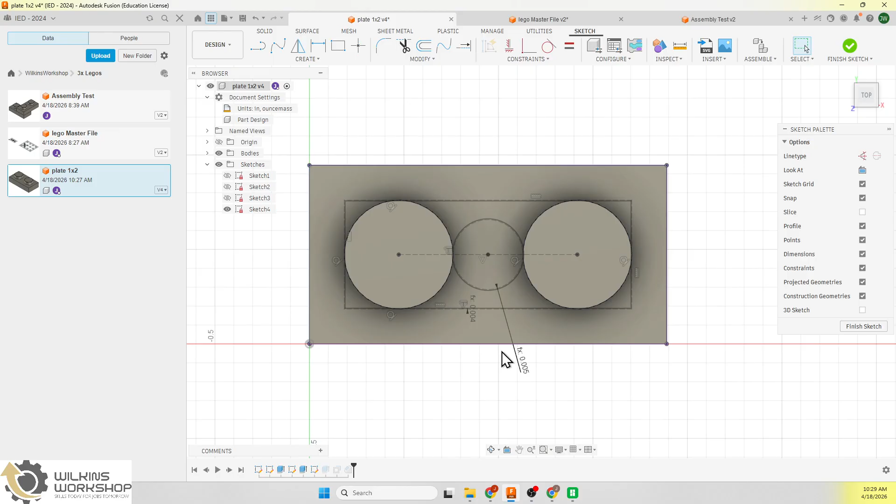So I went ahead and did a modification, and I'm reprinting now. Instead of doing a kerf divided by 2 for this offset, I went ahead and made it kerf. So it should squeeze a little bit more on the sides, and that should give us a little bit better grip onto our material. So we're going to test that. In about 30 minutes, I'll have 2 new parts, and we'll test if the fit on those is better.

These fit together, but again, not thrilled with it when you just put a single pin in there. It's a little loose, and really putting the double pin, if you have a stack of 4, they don't hold together, they just fall apart. If you just put 2 together, they sort of stay, but even then it's a little off. So we're going to make that adjustment and move forward. But until we get those done, we're going to move on and make some more pieces.

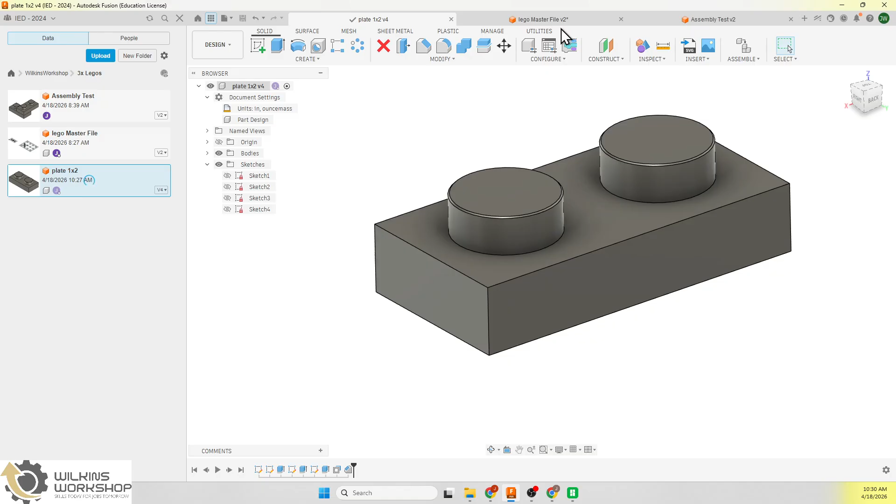So I'm going to go back to my Lego master file. I'm going to make this adjustment here to kerf, same as I made on my other piece, and we'll see if that works out. We'll just keep updating that master file as we need.

Right now we're going to learn how to make a parametric Lego, so we can make a bunch of different blocks or bricks with one file to start with. So let's save this one - we'll do a file save as.

Let it upload, finish here. And we're going to call this parametric Lego.

And now this time we're going to essentially just build a 1 by 1, and then we'll use a rectangle pattern to make whatever part we need from that 1 by 1.

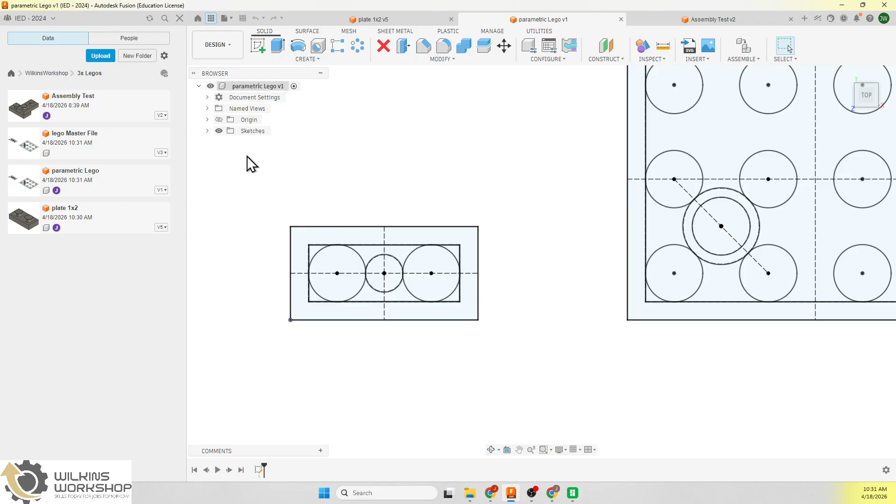So we've got our parametric Lego going. We're going to turn off this sketch, start a new drawing, and we're just going to do a 1 by 1 here, so it's going to be a Lego base by Lego base.

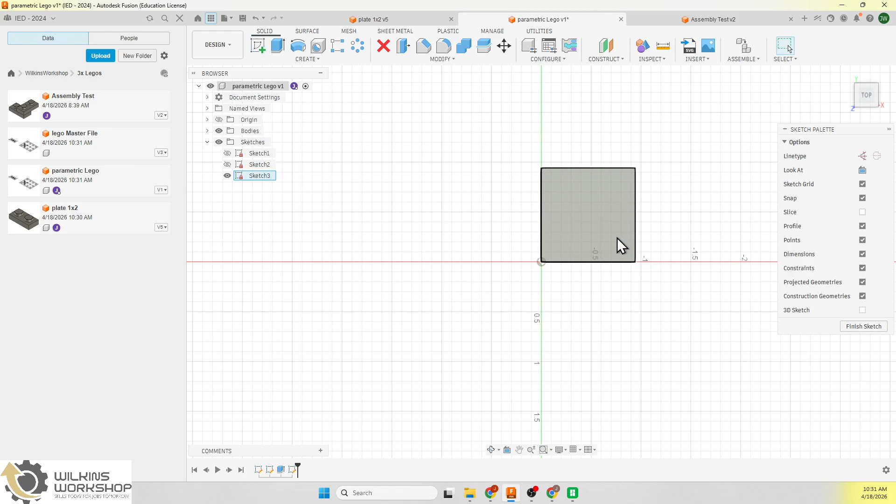We're going to extrude by partial. We're going to make a construction line across and make a circle for our stud. Dimension that, extrude that. And this is the start of our parametric Lego.

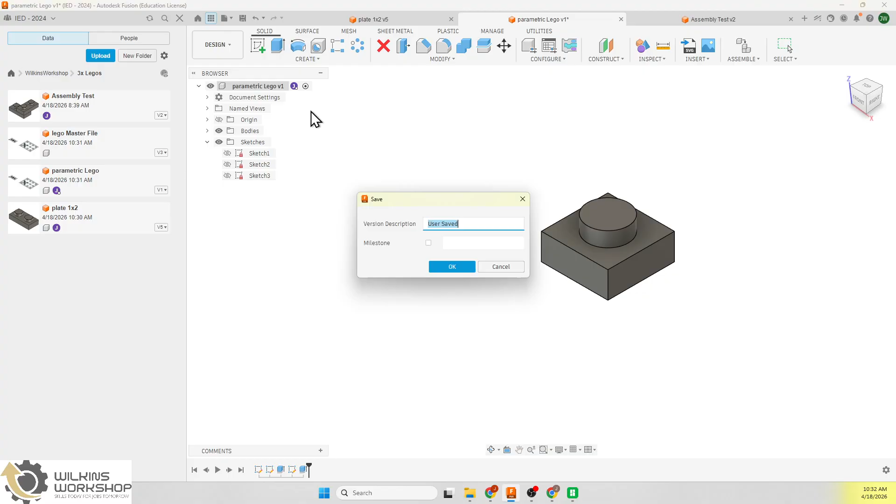So we're going to go ahead and just save that as is. And now we're going to move on to our next plate. If we look at our parts list from before, you can see that we've done our 1 by 2. Let's go ahead and make a 1 by 6, and then eventually we're going to need a 1 by 4 as well. Actually, let's do the 1 by 4 first, then we'll move to 1 by 6, and then we'll show how to make the 2-bys as well.

So at this point we can do a rectangle pattern, but we're going to do a file save as. Actually, let's just do it right here in our parametric Lego, and then we'll do a save as once we set our parameters. We're going to add 2 more parameters to this.

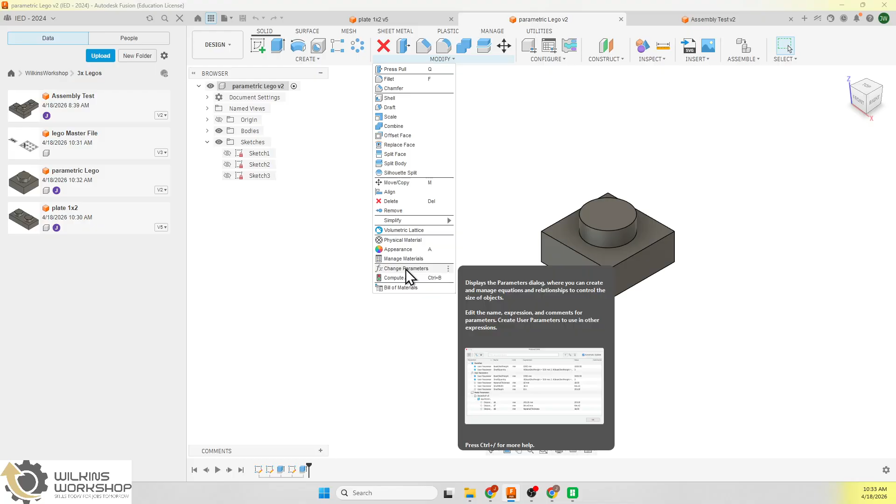Let's add a width. This is going to be a unitless quantity, and we're going to start with 1 - so number of studs on the width.

And then we're going to add a length. Again, this is a unitless quantity, and we're going to do a 4. This is number of studs, length.

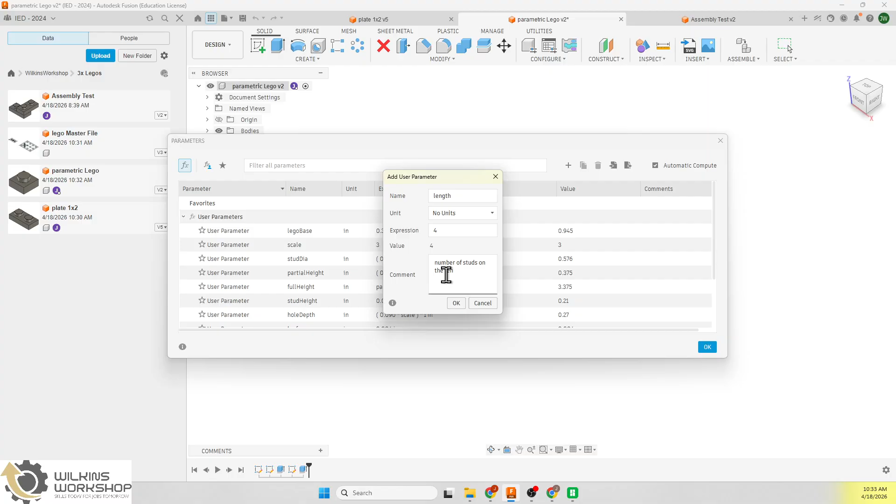And now when we do our rectangle pattern, we're going to rectangle pattern some features, and we want these 2 features that we're going to rectangle pattern. We're going to pick our axes as this one and this one, and we're going to move this way and this way. Let's change this to a 2 so we know which one we're dealing with - so you can see there it is.

We're going to do spacing - spacing on this is going to be Lego base, and spacing on this is going to be Lego base. This is only going to be a 1 in this direction this time, and this is going to be a 4 this time. But instead of using actual numbers, we're going to say length, and on this one we're going to say width, and then say OK.

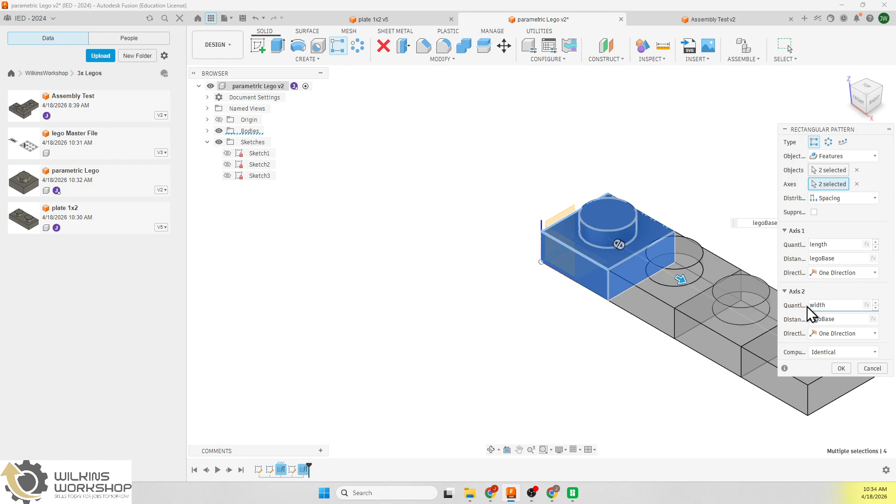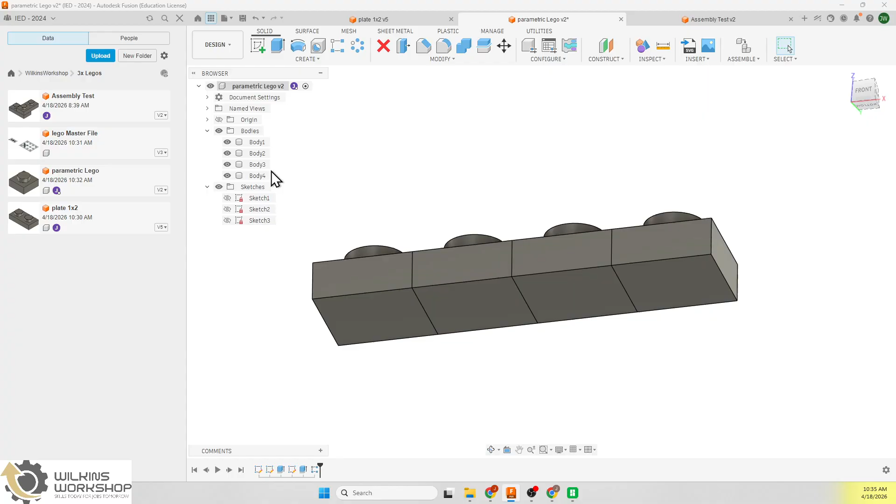Now we want it to join those together. So the question is why is it not joining those as one? See how those are independent - they shouldn't be individual bodies, they should merge together into one unit. So let's figure out why it's not happening.

If we pick bodies, we just select the body. And that didn't work either. Well, this is always fun when you're trying to figure things out as you go.

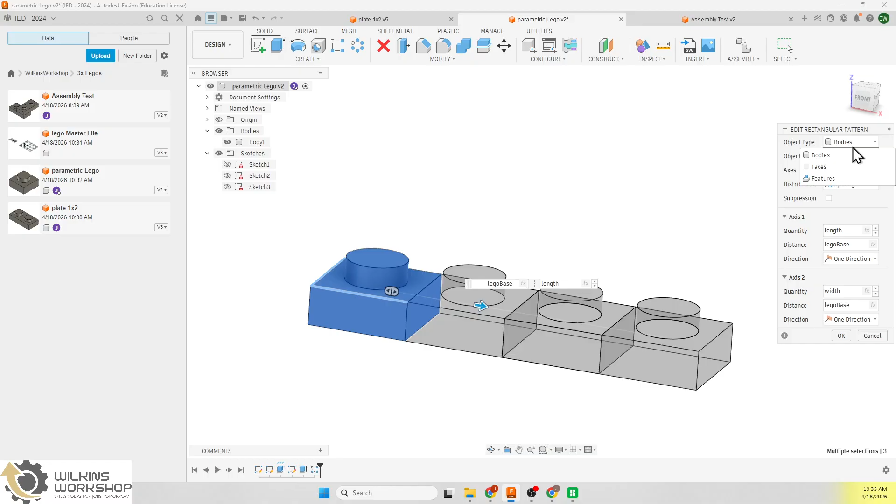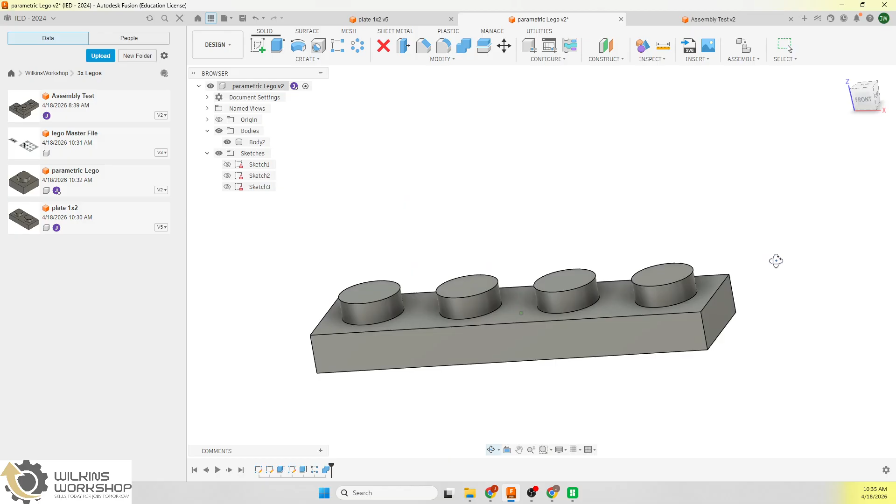I guess at this point we could just take all of these and merge them together using the join tool. We'll just use that as a workaround. Sometimes those will just fuse together. I'm not quite sure why they're not, but that's okay. We're going to go with it here.

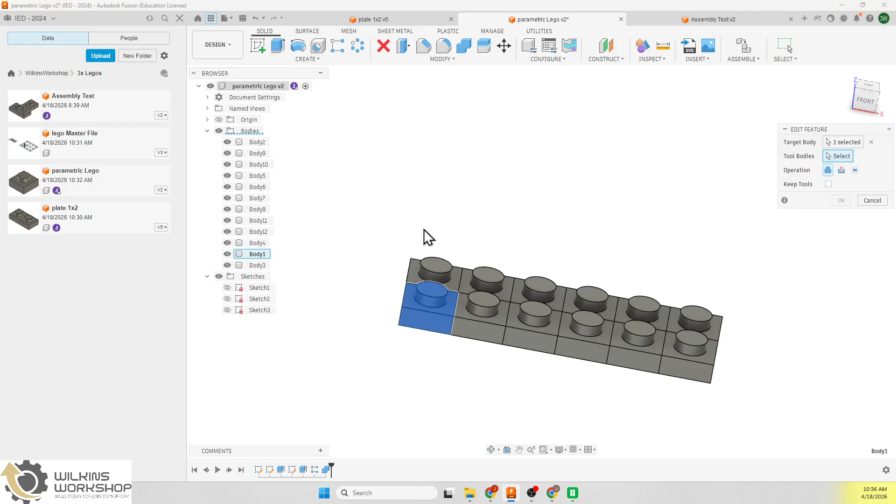Here's the great thing: you can go in and change parameters, literally just change the width to 2 and the length to 6. When you say OK, you make a big piece here, but then we want to select our target body, we'll pick this one, and then our tool bodies, we'll pick all the rest and say OK, and now we've merged it together to make a 2x6 if we need to.

This is really kind of nice to quickly make the top part of your sketch or part. Then the other thing we can do is go back in time and add a chamfer on this of kerf times 2.

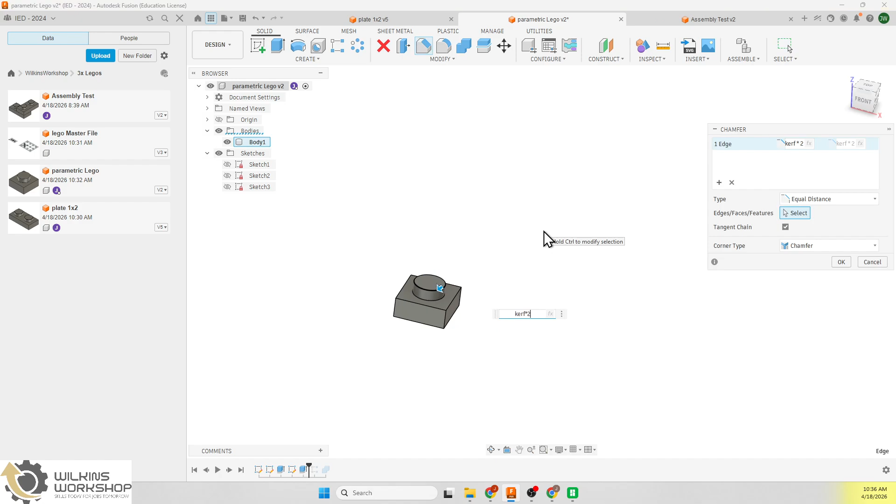When we do our rectangle pattern, we can also rectangle pattern that feature. We're going to hold down Control and select that feature as well. And now all of our stud tops have a chamfer on them, which is kind of handy. But this is how you make a parametric Lego.

So we'll save that. And then at this point we can do a save as, and we can call this plate 2x6. You can see we've started our 2x6 plate.

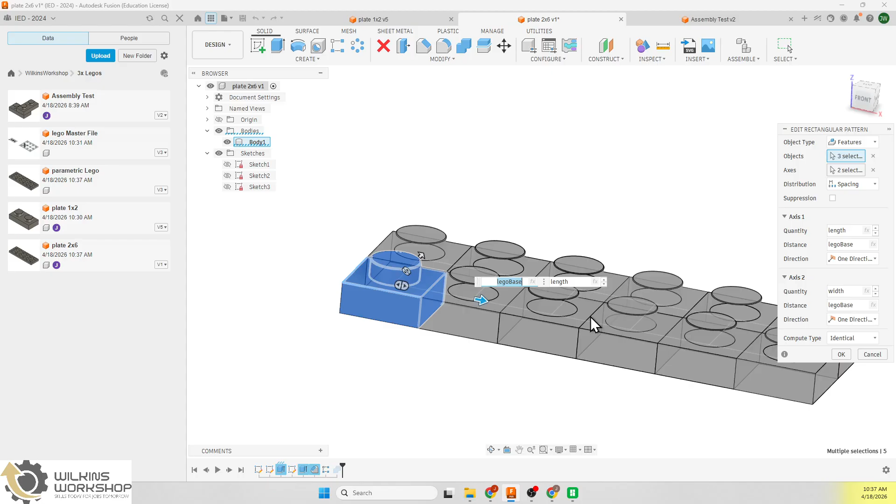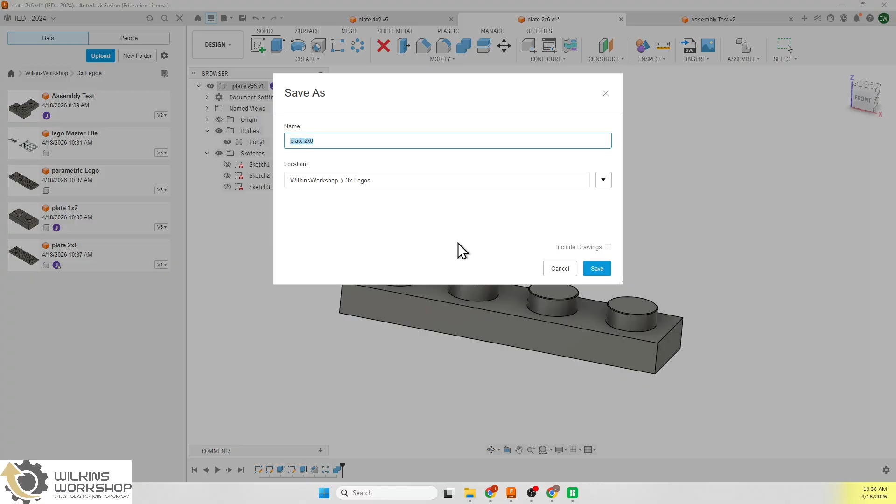And then we'll just do a file, save as, and we'll call this plate 1x4. Now we should have that file there.

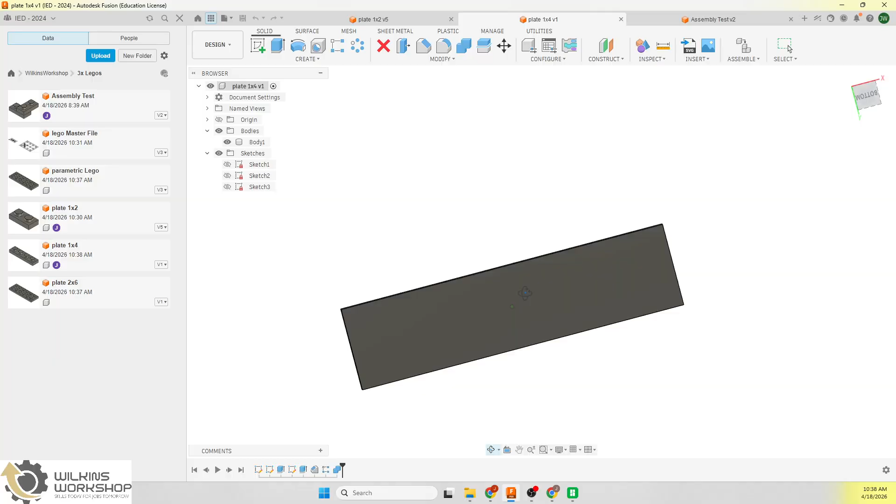So we can create a lot of our parts really quickly with that, starting with that parametric Lego file, and then making your adjustment to those two parameters, and then do a save as, and now we can work on the underside of the part.

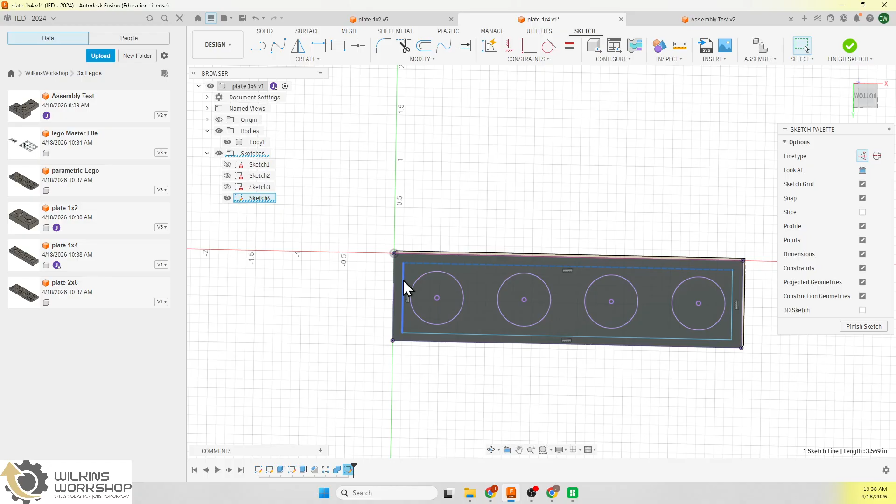So next phase of this is go to the underside. We're going to project, so P, project all of those things there. We'll do our rectangle pattern. Again, we want those to be construction lines. If you forget, you just go back and click. And then we can make them tangent.

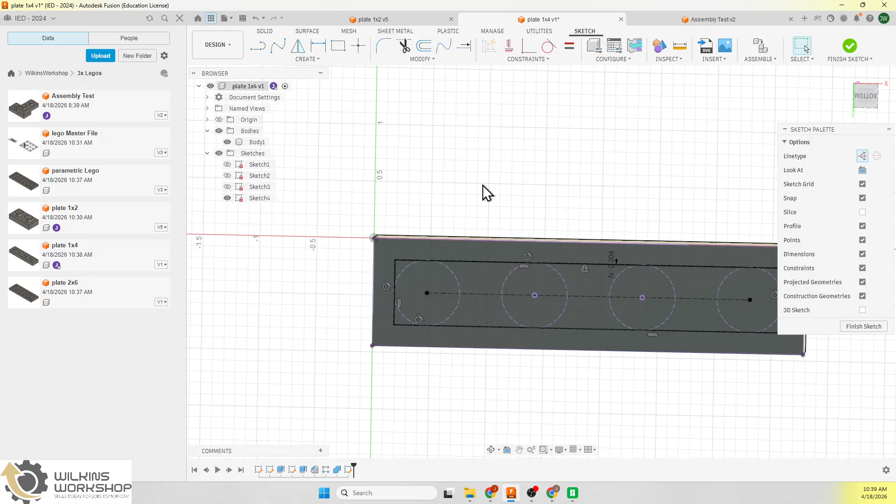Go to offset, O is your hotkey for that. And remember, we're going to change this to kerf on this new offset and try that. We're going to do our line, going to be a construction line to go all the way here. You can turn all these into construction lines if you'd like, which I highly encourage. And then we're going to create some circles that are construction circles.

Now we can set these equal to each other or just make them tangent to the other circle as well. It's usually faster. And then we can do offsets. Again, these are not going to be construction. And we're going to make this kerf times 5/4.

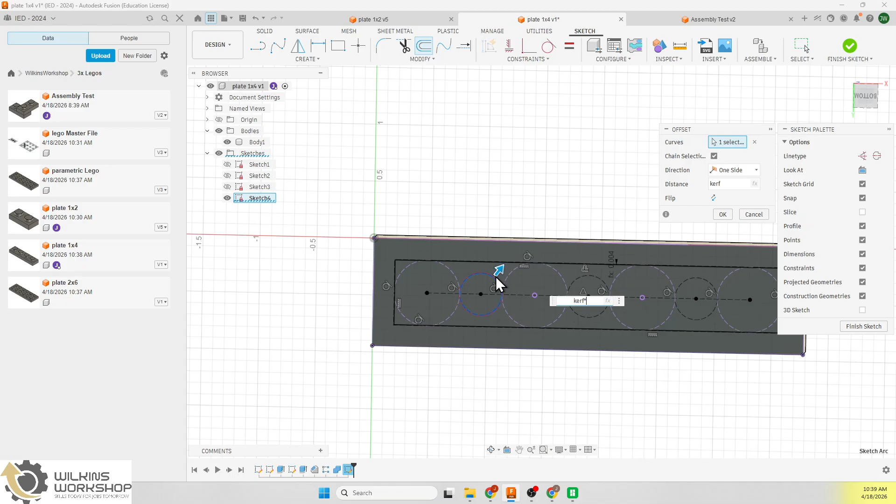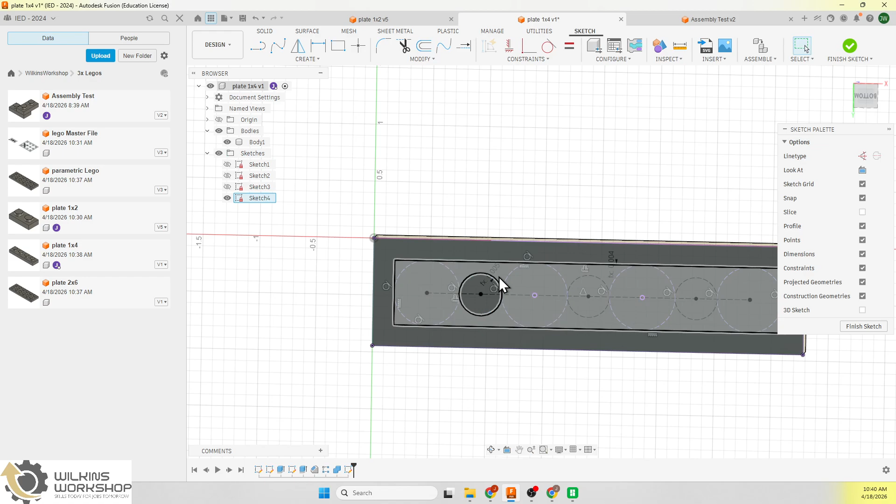When you do offsets for the next ones, and it's looking for a dimension, you can usually click on this dimension, but it's not liking that. The other thing you could do, since you've dimensioned this first one, is essentially create some circles on these and use the equals constraint to say these are equal, and that this is equal to this one. Now they're all the same size, pressing into those parts.

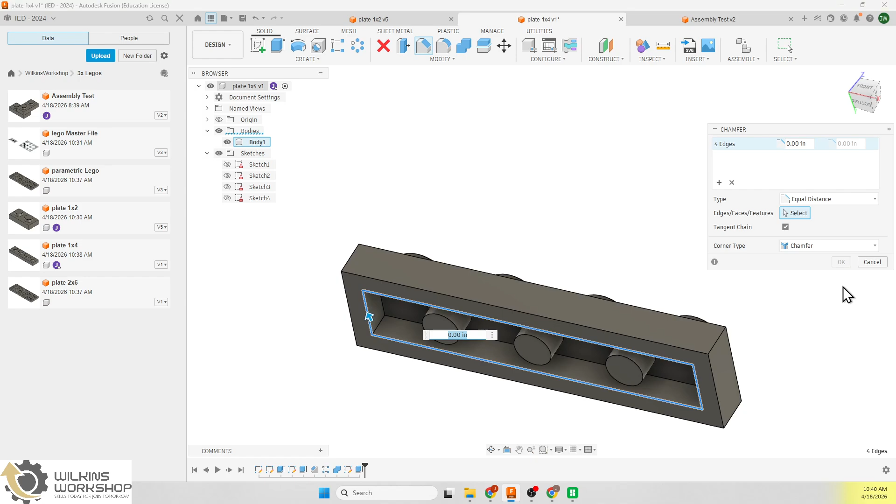Finish the sketch, extruding this, going negative hole depth, and then doing a chamfer on these here of kerf times 2. We got to get these here, hold down control, and then select these as well. Got them all now, hit OK.

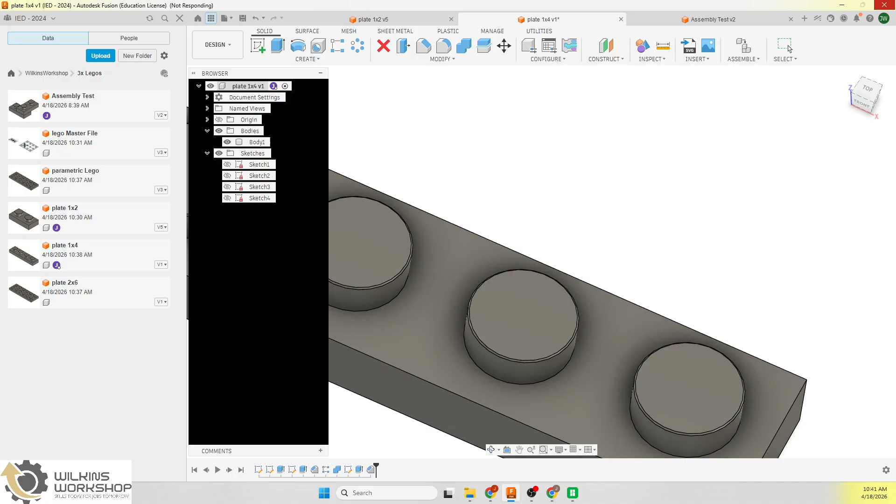And we're going to save that. Now, how do we make a 1x6? Well, pretty straightforward, as long as I don't freeze here. So we've saved this as a 1x4.

Now, how do we make this into a 1x6? Pretty straightforward, we do a save as. It's going to be plate 1x6.

And then I'm just going to change a few things. I just have to adapt this a little bit. So I can go into modify, and I'm going to change that parameter, the length, from 4 to 6.

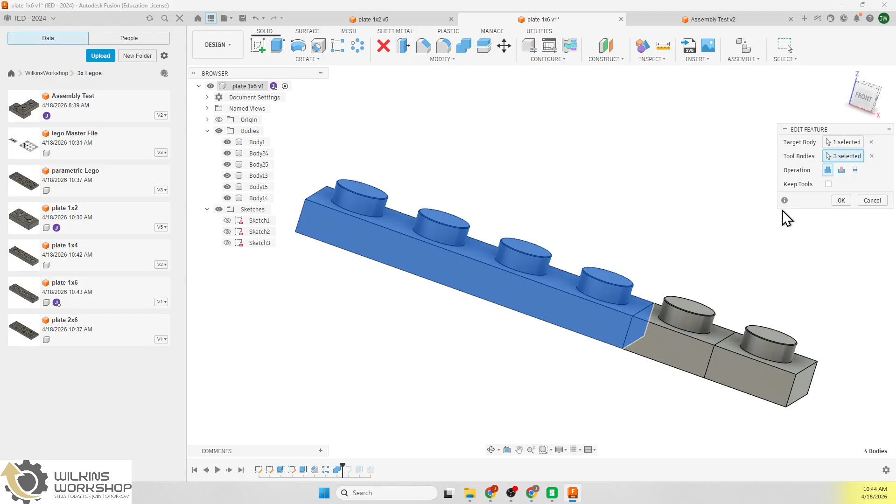Say OK. And then I added a couple things down here, but I'm just going to go back in time and make a few adjustments here. My tool bodies, I'm going to hold down control and select these two as well. Say OK. I made it 6 long, but if you look on the underside now, it only does these.

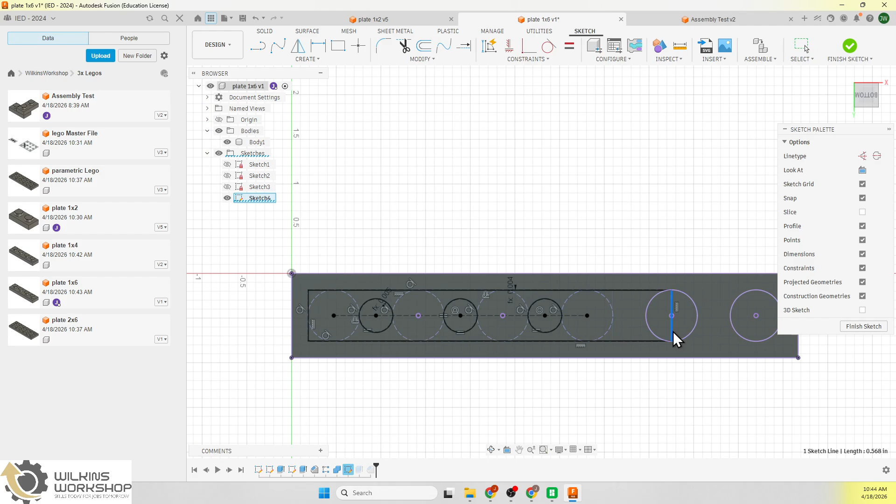So I'm going to go back to this original sketch and remove this tangent constraint. I'm going to delete that one and move this all the way to the outside here, and make this now tangent to this one.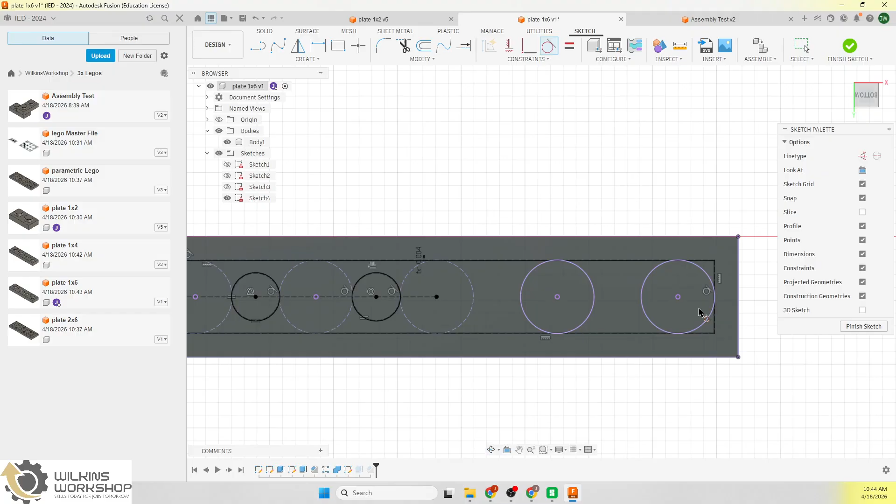Now that's not what I wanted to do actually. So you can see I grabbed the wrong one. So I want this right here, the one that's a construction line. So I've grabbed that now and made it tangent to the circle. So that looks good. I can make these into construction lines.

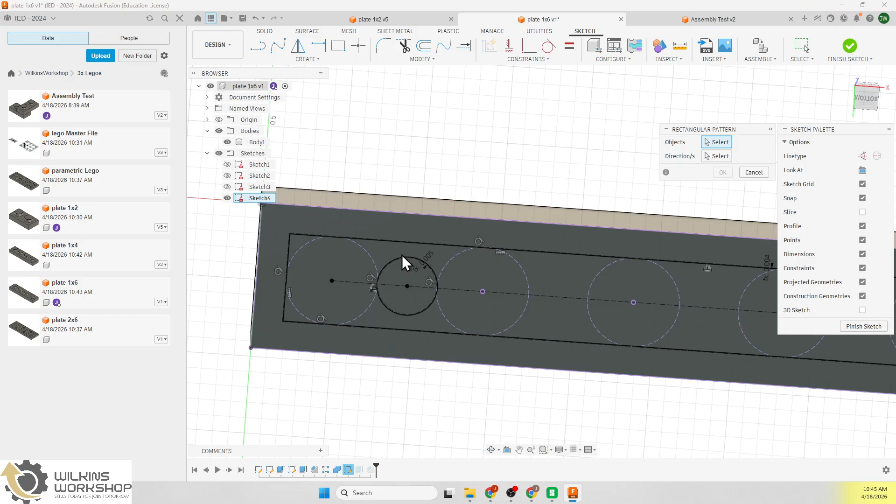And now, instead of doing the first one and doing all the subsequent ones with sketches, I'm going to show you what I could have done originally. This is essentially just another rectangular pattern. So if I set up the first one, I can then do a rectangular pattern of just the circle. And then this direction, this one I only want 1. So this is going to be width minus 1, if you think about it.

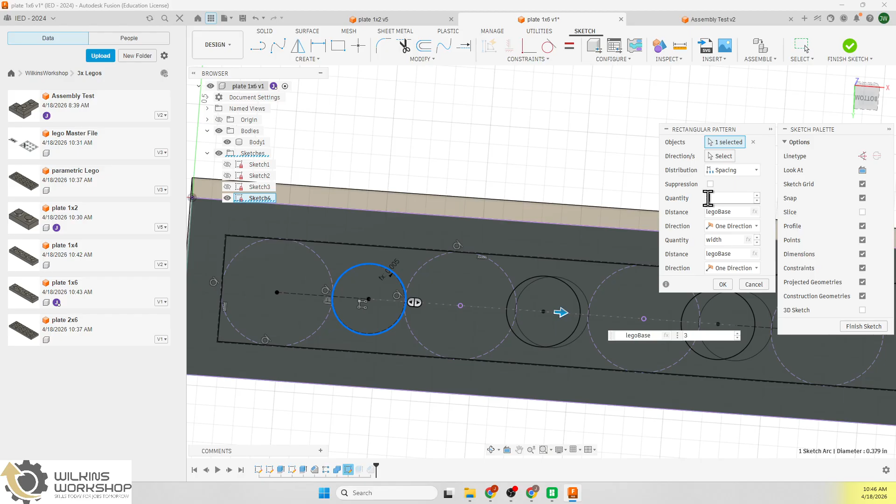Or, I'm sorry, just width. What just happened there? Don't know what happened. Try it again. So this dimension is just width. So it's only going to be one of them. So you can see it changed to that. The spacing is going to be Lego base. And the spacing here is going to be Lego base. And this distance is going to be, there should be 5 of them going this direction.

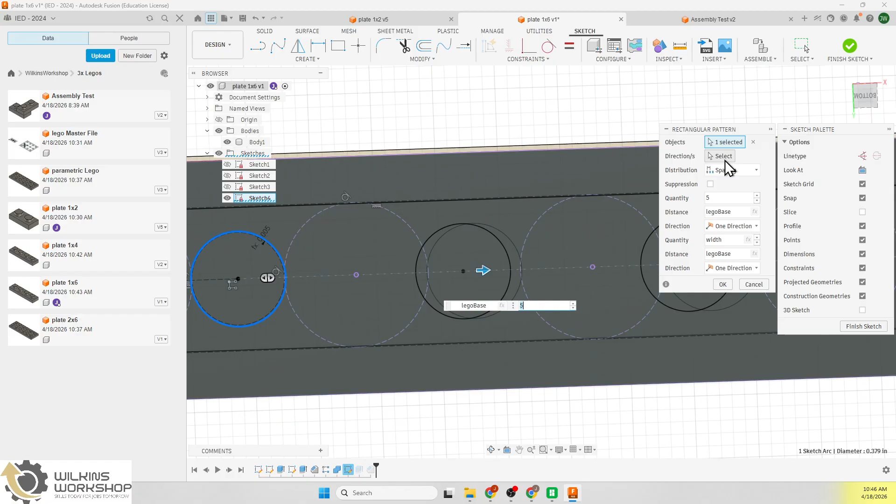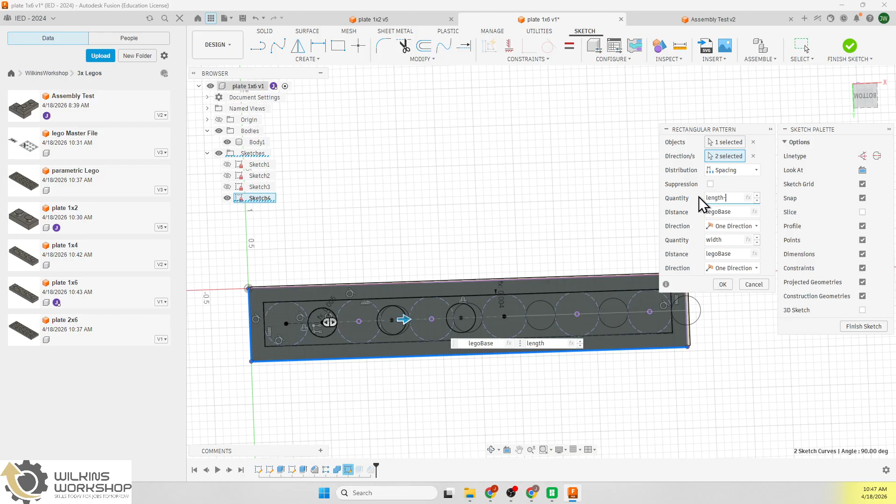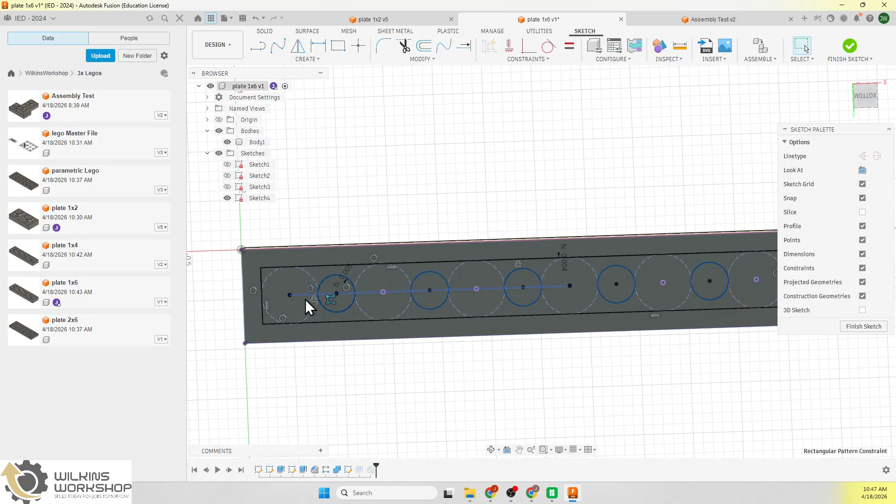And now spacing. And so you can see that these are the ones we're going to remove, but we want to do 5 at Lego base. Now, instead of 5, this is actually length minus 1, because we have 1 less than length on this. And, oh, I think it did that rectangular pattern. There's the first one. I'm going to delete that one. I don't know what happened, but we'll get rid of that. And there we go. So our rectangular pattern should be the one that's there. There's all of our spots on this.

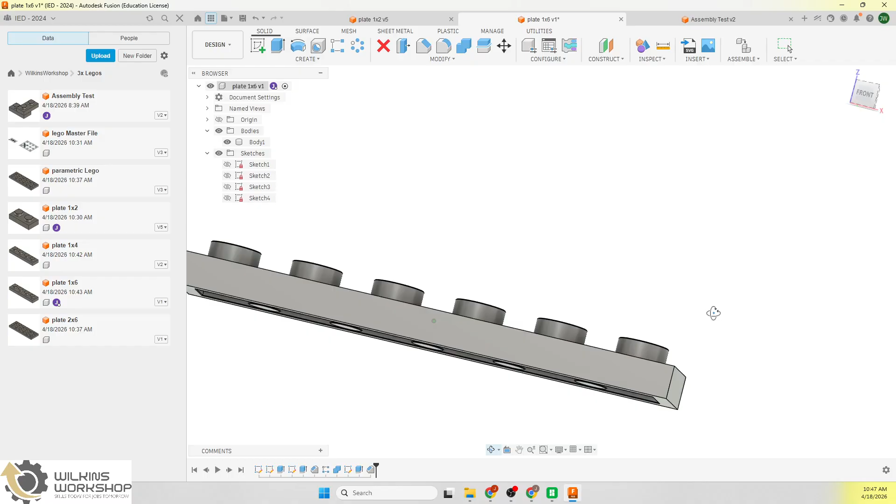And then when you finish the sketch, we go to extrude. We're just going to deselect those. Say OK. Check our chamfers and just add chamfers to each of these. And there we have it. There's our 1x6. So just modifying that 1x4 pretty quickly gets us our 1x6 plate. So once these 1x2s finish printing up that I've got going, I can now test those, make sure that that distance is good. If I have to make adjustments, I can make some quick adjustments here.

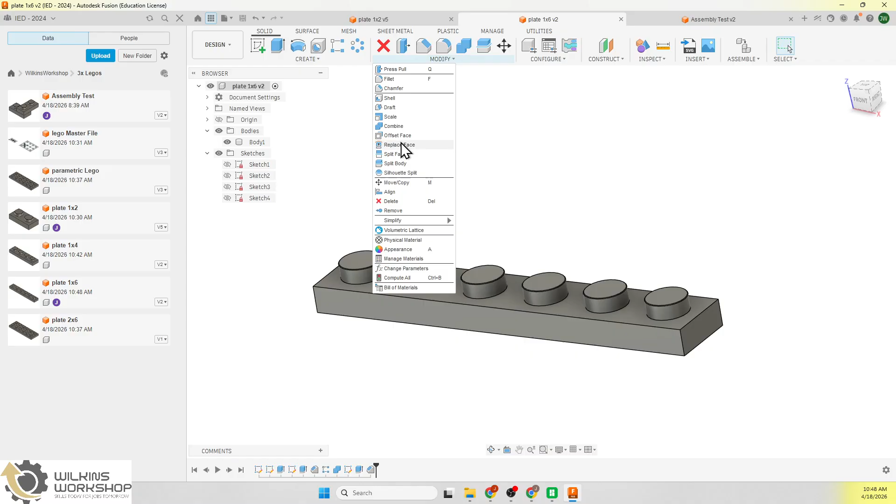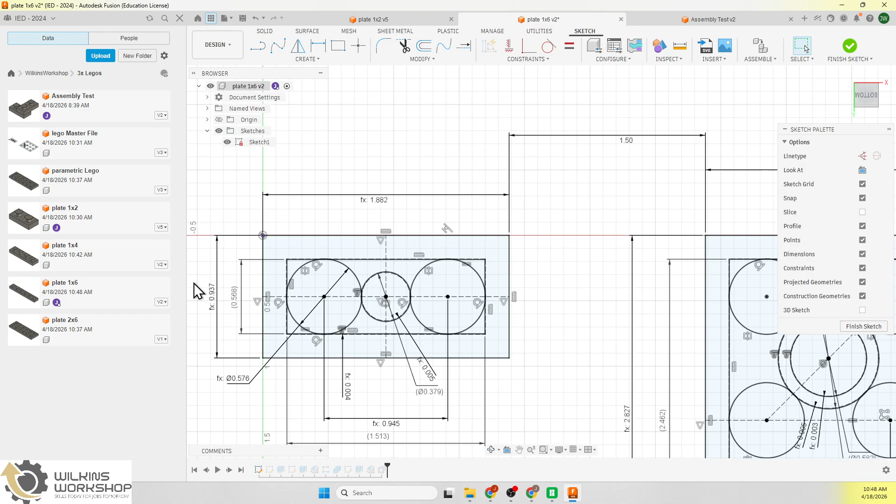But, oh, one thing that we forgot to do on the 1x4 plate and this, we didn't check our overall, we didn't inspect this, and this is too wide. We forgot to do our face offset at the very end. So let's go ahead and take care of that. So we've got an offset by kerf around the whole thing. So we're going to do a negative kerf for our air gap. And now the outside should be 0.937. And the inside, if I were to measure that, it's 0.568, which again, I can go back to my original, and there's my 0.937, and there's my 0.568.

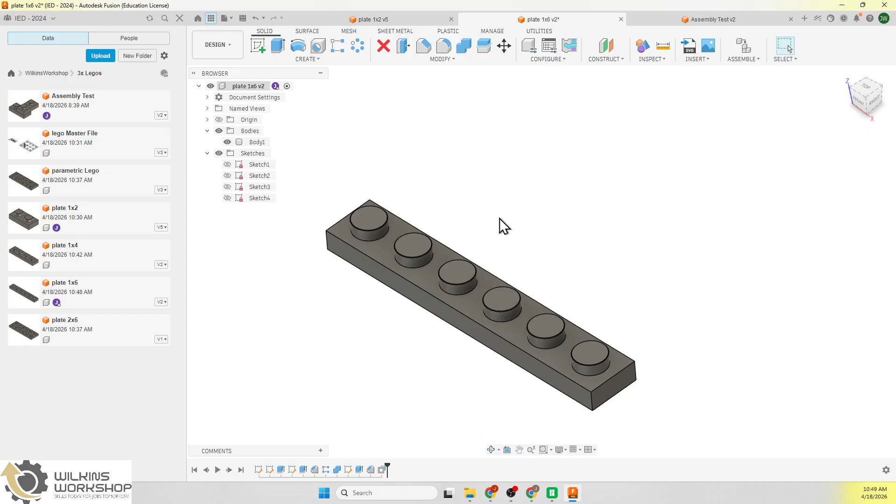Now, do I have a drawing for a 6 long? No. Could I do that? Sure. I'm not going to worry about it. Again, I think once you get the hang of what you're doing, you don't need to do your checks on everything. Just every now and then give it a check. Make sure you're good. Again, you can check that the center spacing is good. So you want that to be 0.945. I'm going to flip it over. Check this. This should be 0.379. And then if we do between centers, that should be 0.945, which is Lego base for us. So this all looks good. I'm pretty happy with the 1x6.

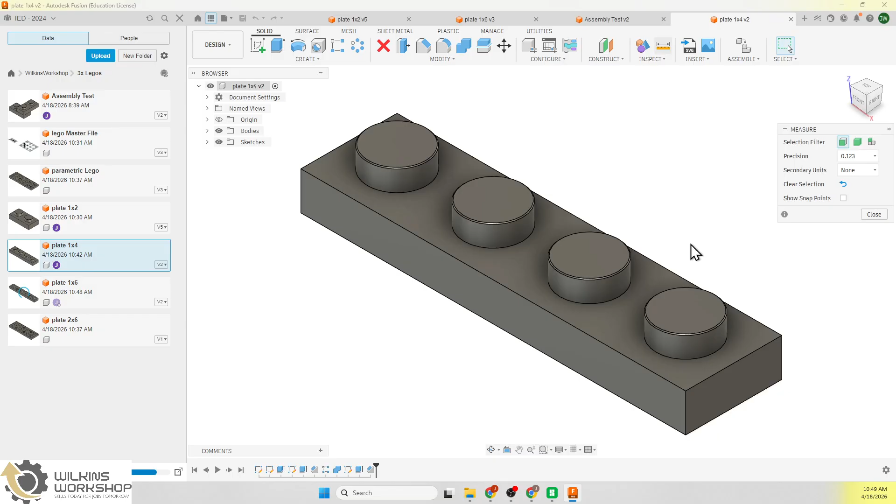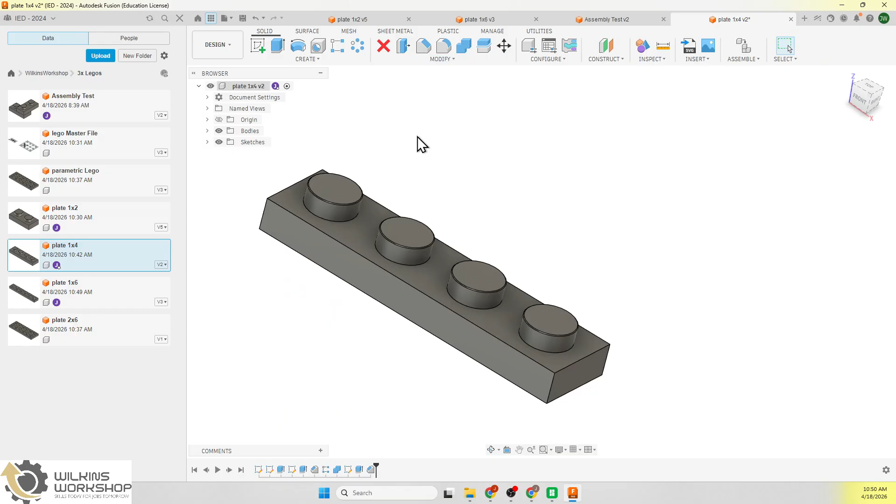I'm going to reopen the 1x4 and show you the mess up here. Again, this is 0.945, and this distance here is 3.78. So when we look at the original sketch, you can see that it should be this and this. So we're 8 thousandths too long here, and 8 thousandths too long here because we have not done our face offset by kerf. So we're going to go ahead and do that. Put that together and do a negative kerf on these. There we go. We've got our 1x4 and our 1x6 taken care of.

Again, we're knocking out parts left and right now. So there's a white 1x4, we've got a white 1x6 plate, we've got a plate that's orange that's 1x6, and now we're just going to keep moving through our 2x's. So the next video we'll work on the 2x's, again using parametric modeling to do a 2x2. So we're going to do a 2x2, a 2x3, and a 2x4. And we'll kind of start with a file and then work our way up.